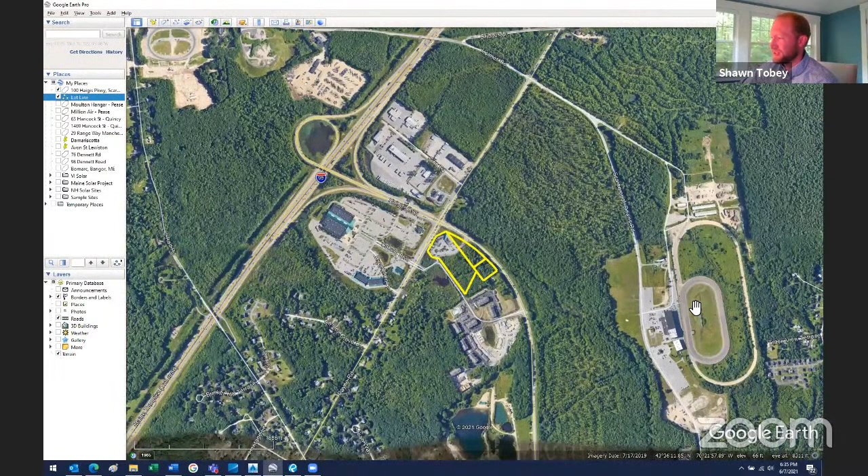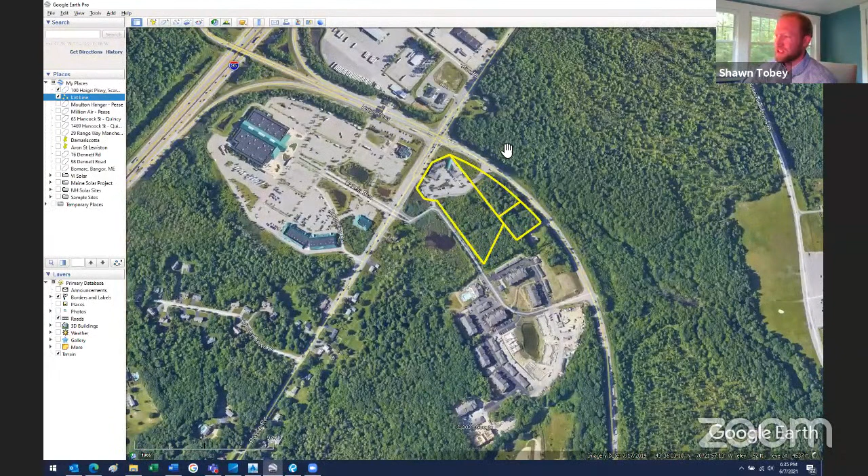I can share my screen here just to get started to show where we are. So this is a Google Earth overview to show where the project is located, on the corner of Haigis and Payne Road. You've got exit 42 here, Cabela's, the Downs here, the Beacon, and then there's the proposed Acura dealership on this corner as well. And if I spin to match the plans, these are the 3 existing parcels that total just over 9 acres.

This is the existing golf and ski shop, as well as the urgent care. So the lots that we are initially looking at are these 2 here. And then because these are all 3 in common ownership, we decided, because of the unique shape of this lot, that we would adjust the property lines to have more area to work with. And as mentioned, the proposed building area is situated probably right about here. There's an existing stream that comes through the back of the site, and then pockets of wetlands in here.

So this is the proposed design that we're looking to do on the site. It would be a restaurant with drive-through facility on the end. There would be a retail component in the middle of the building, a bank on this end, and then a second story of office space. Trying to get a good mixed use clientele on the corner here, especially with the apartments here and all the development going on the other sides. We thought that these uses really coincided with what was there, and would also capture a lot of trips in the area.

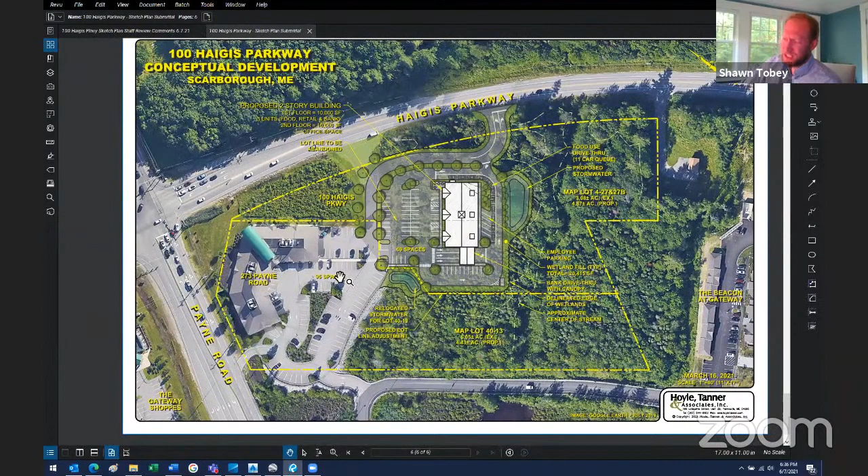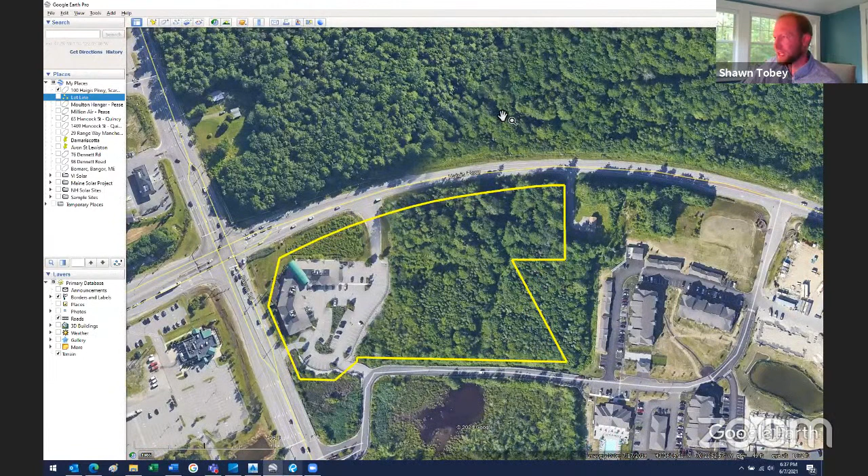So we just wanted to go through with the board, because it's a very unique site in the sense that it has a lot of frontage where you have Payne Road and Haigis Parkway. With the existing access that comes through out to Haigis Parkway, DOT has a restriction on this driveway that any new development here requires pulling this driveway back to the location where it's situated now. So that's kind of why we have this unique driveway that comes through, because we're trying to maintain this pass through from the Beacon. There's cross easements that allow a lot of interconnection to the different businesses to keep trips off of the main roads.

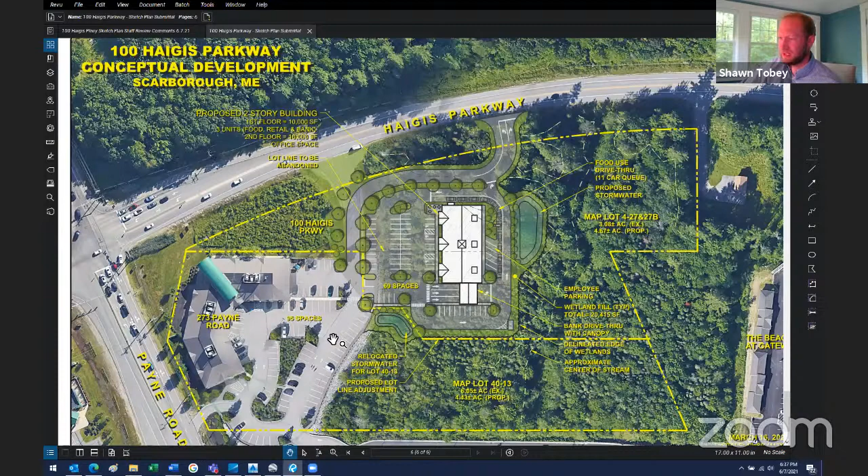So we tried to push the road as back as possible - this is the limit of where the curb cut would be. It's teed up with the Acura dealership that is proposed on the other side. And we bring it in front of the buildings and then back through here. We felt it was probably the best location. We could probably talk as we get into the questions a little bit further with that.

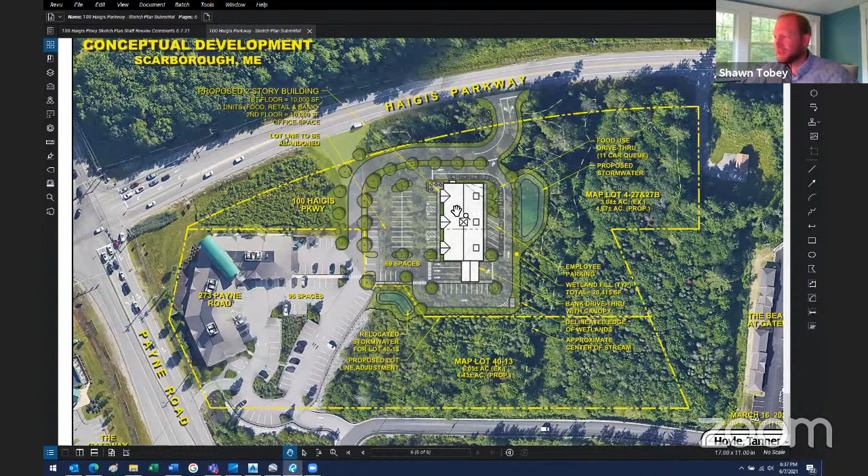And then also with the building itself, we tried to face the building towards the main view shed of the property, which is this intersection. With a retail use, we want it visible from here. And that kind of forces the drive-through to be on these ends here. So even though this is kind of the face of the property, we're leaving the vegetation here while maintaining this is the front. So it's a unique situation where we assume that when cars are traveling 40 miles an hour through here, they're not looking hard right at this end of the building. It'll be fairly screened with the decorative front of the building and the storefronts facing the main intersection on that side.

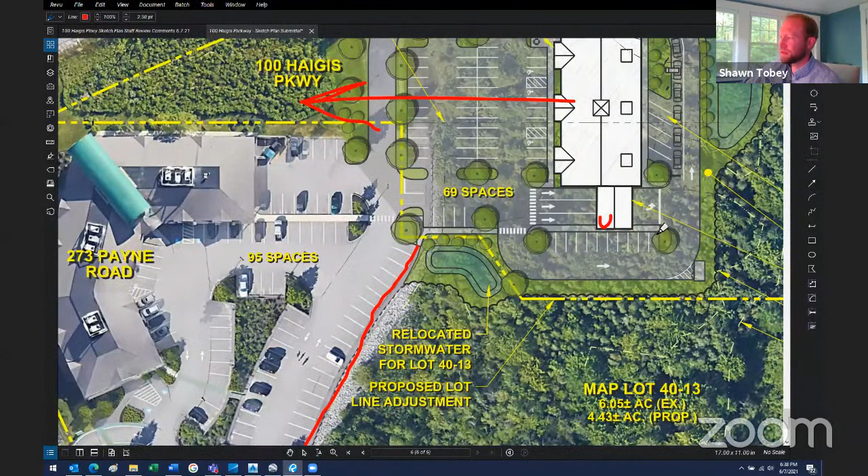We really tried to design it so that all these facilities, the sidewalks, this building has a lot of interconnection. There's a sidewalk that runs through here, connects back around to Payne Road, and then this sidewalk connects all the way back to the Beacon. So with our design, we picked up the sidewalk, continued it all the way through here, and up all along the front of this building itself. We don't have any proposed connection back out to Haigis because there's no sidewalks there now. That's something we could explore if the board felt that was important. But right now we wanted to maintain the good connectivity here as well as all the residents that are out here.

Going forward with the design, there would be some pockets of wetland fill to accommodate this, with the remaining areas staying undisturbed. We're teetering on the line with site law, depending on where we end up with the final layout going forward. Early coordination with DEP has shown that these two properties will be considered common scheme, and going forward with the permits, all of this would need to be worked together along with existing wetland fill.

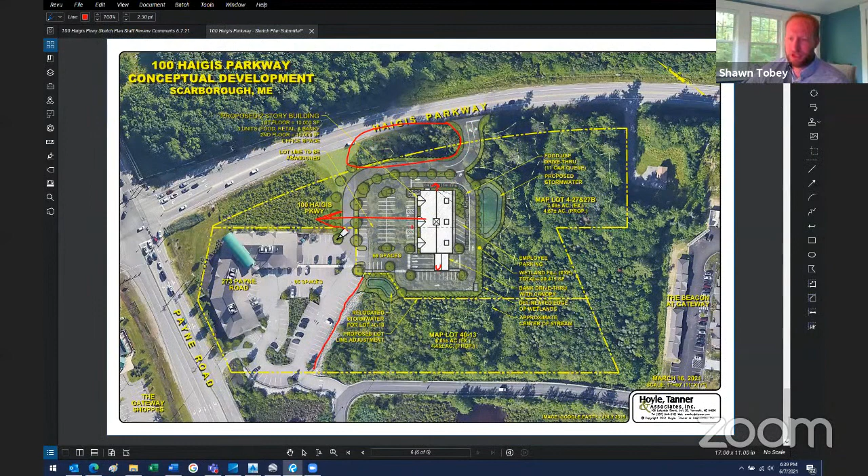So I think at this point, I turn it back over to the board. If there's any questions, I think we'd like to just get some initial feedback, see which direction we should be headed as we take this and put it into more hard line work and design, and move from there.

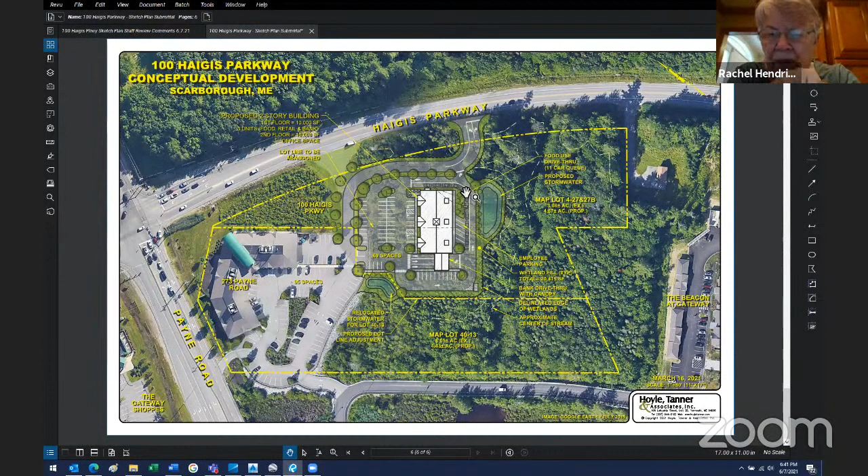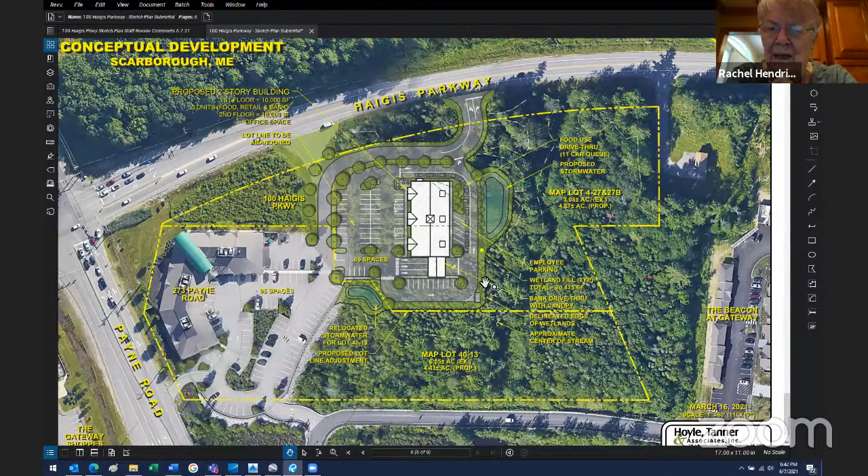One of the concerns I have is the traffic flow around the building. It looks as though you have folks exiting near the south where the bank is. If they want to leave the property, they have to turn left, at the same time as people queuing for the restaurant takeout are turning around that corner and also going left. It seems to me that's a recipe for fender benders, unless there's really good signage or a way of handling that queuing while people are exiting from the drive-through at the bank. You don't have to tell me what you're going to do right now, but that's something I'd have a concern about.

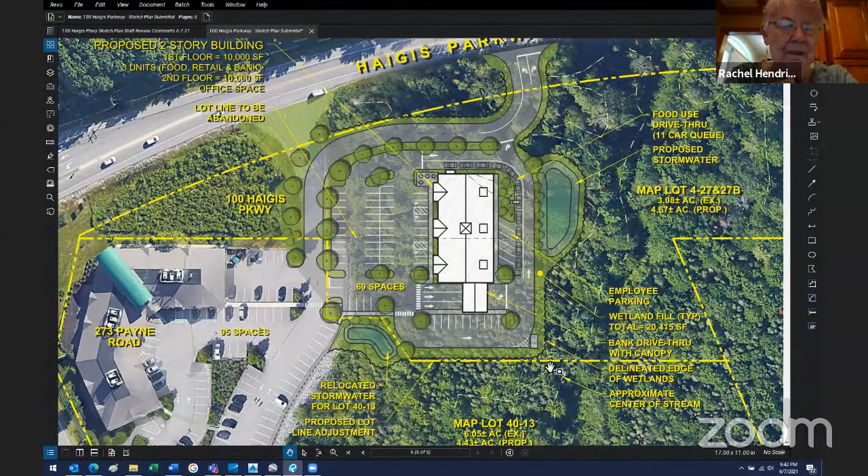One thing that makes a lot of sense is that the front of the building faces the view shed onto Payne Road, rather than having to flip the building to get the front onto Haigis Parkway. I think that's a reasonable way to look at it. It might be helpful if you show us what would happen if you did flip it so the front of the building very clearly is on Haigis. I don't think that would work too well, but I'd appreciate seeing that to come to a firm decision on what we consider the front of the building to be.

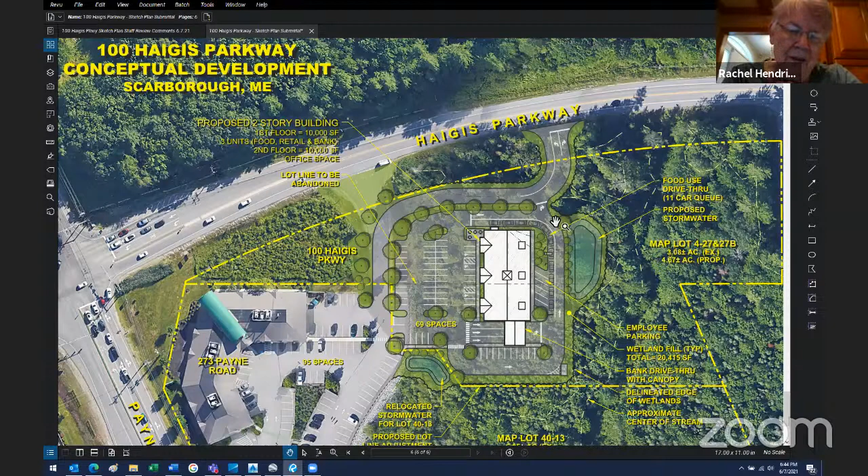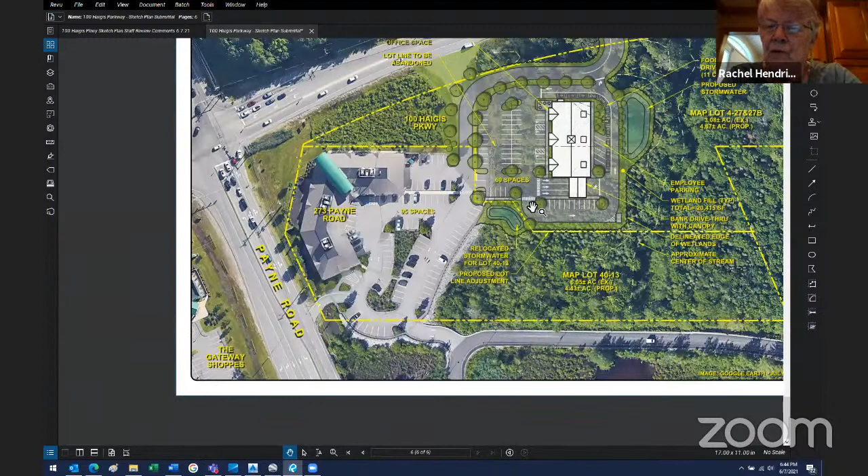I think we need to continue the sidewalks. As we go along Haigis Parkway, as the downs come in, as sidewalks go in, there's going to be more people walking up Haigis Parkway. So sidewalks in a couple of different places would be possible. One is up the curved driveway so people can continue past the buildings already there and cut across to Cabela's at the light, using the cut that's already there since the ground's cleared, making that a sidewalk from Haigis directly so people aren't walking around. That's a possibility, but I do think a connection of this property from Haigis to the Beacon Gateway sidewalk would be a very positive aspect of the development and the neighborhood.

And I think that's all I have. Thank you.

Yeah, we can definitely, the angles of the building we went back and forth on a lot, trying to find the best way to get the storefronts visible and the best angle. We have some old renderings we could submit for reference, kind of as we went through that exercise, so you can see what they looked like.

And with Haigis Parkway, we're coordinating with Sebago Technics, who's doing the Acura dealership, and Gorrill Palmer, as you know, is doing the downs. So there's kind of three people reworking that Haigis Parkway section all at once. We'll work with them to make sure any sidewalk improvements and turn lane improvements get coordinated together as we go forward with DOT.

Okay, I do think pushing pedestrians towards the actual intersection of Payne Road and Haigis is not something to be desired. Most people are not going to want to try to cross Payne Road there. They're more likely to want to cross Payne Road where the Beacon driveway comes out. So any connection to that driveway, I think, is important.

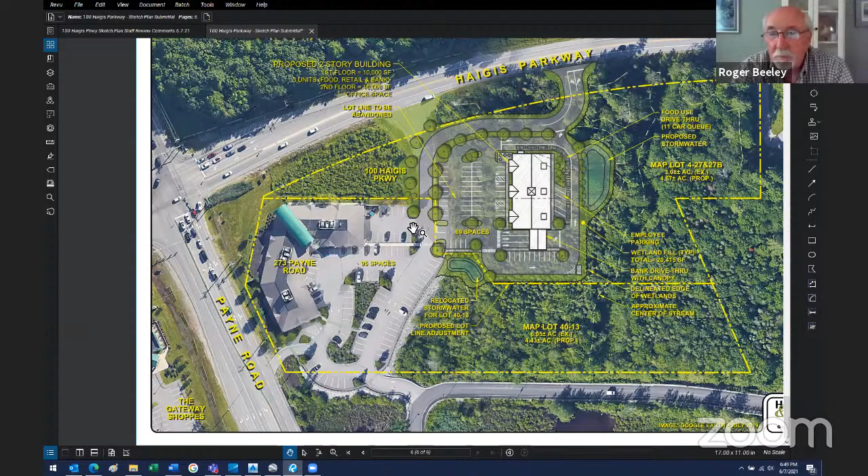Thank you, Roger. Any other board members with thoughts, questions, input? This is Rick, I just have a quick one. Kind of what Rachel was saying, so where the bank drive-through comes around, and there's the other drive-through coming around on that lower right-hand corner.

Down a little bit, right there, that tree right there. I know you're trying to do as much landscaping and make it as aesthetically pleasing as possible, but anything that - I can see that as a pinch point. And then get rid of that.

Our plan with this is that if you're coming into the drive-through, you would come in through here, go around, and then you would queue. There'd be an 11 car queue here, which is sufficient for the use. And then the bank would come through with a stop here and a stop bar. Like you said, we'll remove that tree and make sure that's not a pinch point. And then this drive-through would exit back through here. And any of the bank with a bypass would have a right out that way if they had to. But we'll definitely go through that in more detail and make sure that's a solid flow.

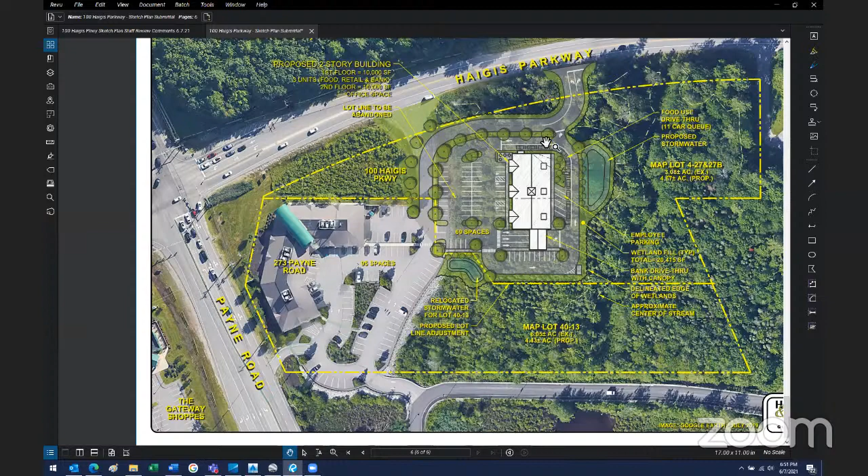Okay, appreciate that, Sean. The other thought would be up where you just exited to the right - yep, right there. I'm not sure if it makes sense or not, but that tree line - if I was exiting to the right there, I may want to take a left just because I could. If that tree line and that island was shifted up a little bit so that you could impede that left-hand turn, then they'd have to go around the parking lot. From a traffic accident standpoint, that might be something to consider. I don't know if anybody else...

You know what, Jennifer might have some input on that. She's the traffic expert. All right, thank you, Rick. Jennifer?

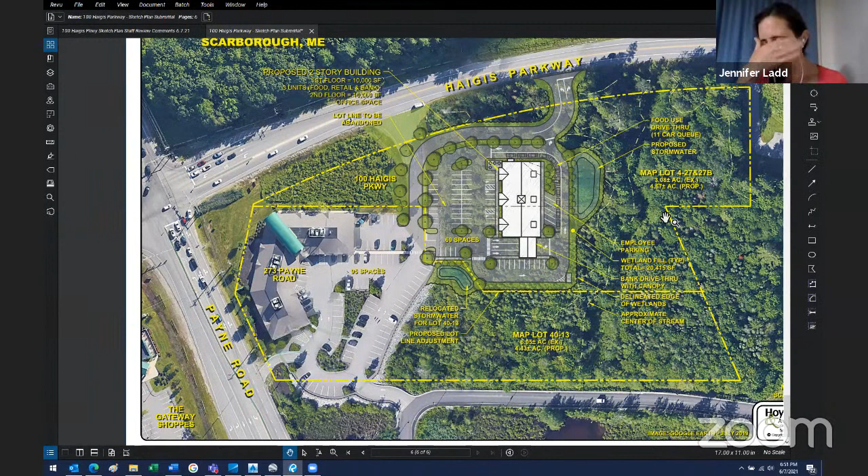I had the same question, Rick, actually, until I noticed that they did include a bypass lane before that point for traffic wanting to take a left. Is that right? The two arrows there - so if you were not to go through the drive-through, but you wanted to head back towards Payne Road, you could continue out and around and then go north or south from this point here. Gotcha, yeah, it just took me a minute to kind of mentally drive around there myself.

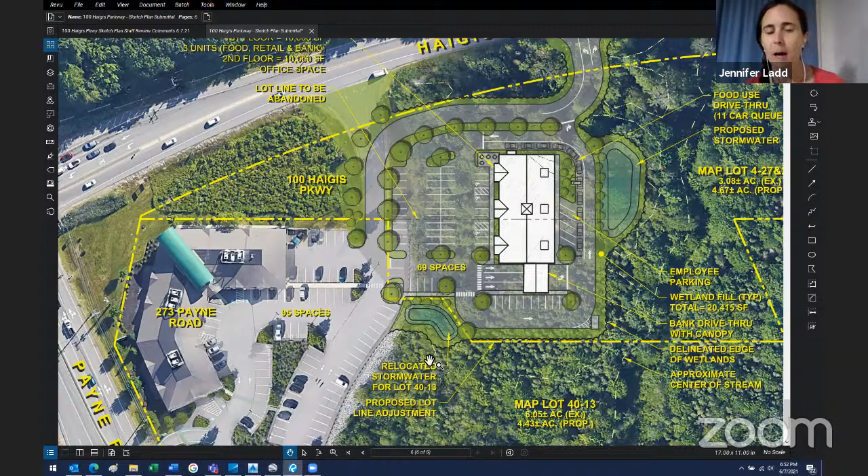Which actually brought me to another comment - understanding you're just at sketch plan level and not fully dimensioned here, but the drive aisle at the very bottom of this plan, yep, right there with a one-way arrow. Again, for someone, as you have this laid out, if someone were to leave one of those parking spaces and want to head back to Payne Road - the way that you've laid that out, while it makes sense to me, if it didn't make sense to me, it would feel sort of circuitous. And I think it could lend itself to people going the wrong direction there.

So I guess I would just be curious to know if there's any possibility for that to actually be two-way and signed two-way, such that it just allows a little better two-way flow around that part of the building. Yep, I definitely think we could look into that. And another thought too - I believe we're overparked by 12 spaces between the two buildings, so we had a little bit of flexibility. I think maybe we could look at the option of just eliminating all those spaces and making that a landscaped area as well, just so there's not those pinch points.

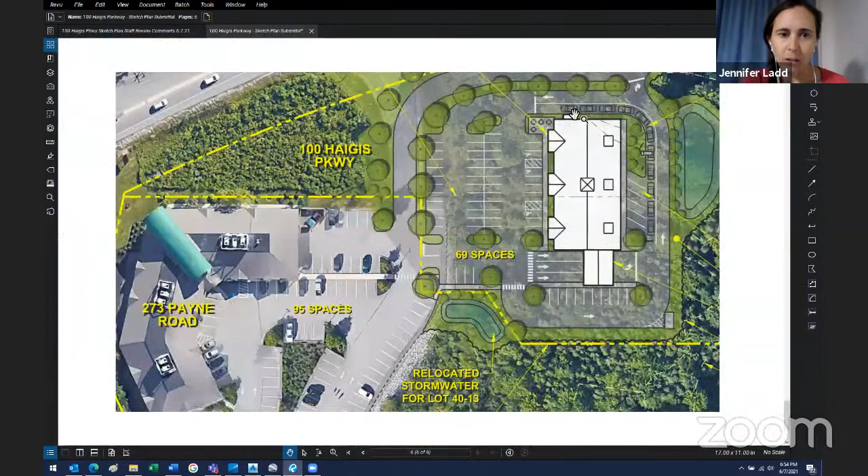The other thing, it looked like to me like a slight skew in entrances to the two different parking areas. So for example, if you've come in off of Haigis Parkway and along the long driveway, right where you have the first opportunity to take a right - yep, towards Golfin Ski - or left. I'm sure you are looking to try and get the longest parking stalls that you can in that main parking field, but sometimes misalignments like that can be a little bit tricky. Yeah, and we can look at the option - maybe the best bet, maybe lose a little bit with the building, but we could shift this up so those two were probably 12 feet apart. We're probably not too far off to get those aligned.

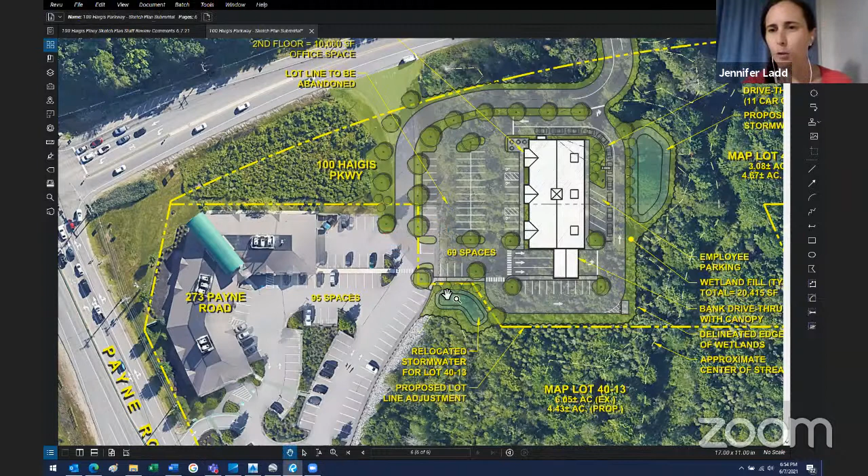Yeah, I mean, I just picture a plow driver or something - they're probably going to plow over that or whatever. And then I did notice early on the proposed pretty good pedestrian connectivity on the site that you are proposing, and how that connects in with what's already there at 273 Payne Road. And therefore then also noticed the lack of similar accommodations out towards the Parkway.

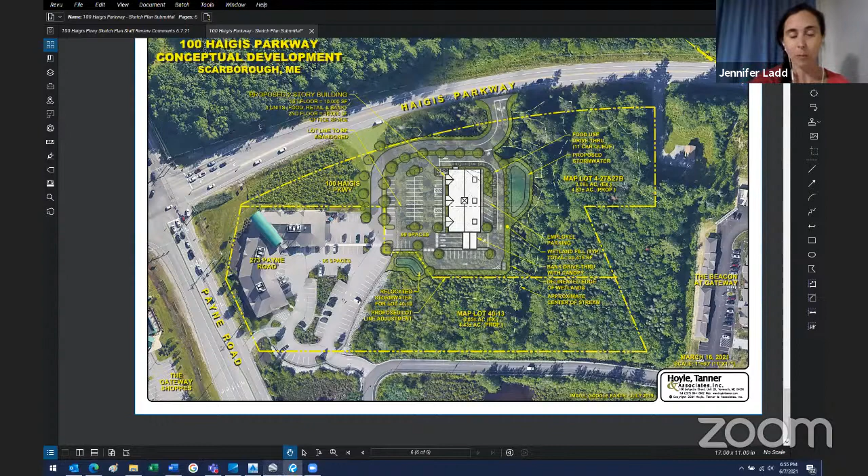While I agree with a lot of the comments about the development coming in this area, bringing more people living and working here, being here within walkable distance for the better part of their days, I just can't get over the width of the right of way on Haigis Parkway. It's so huge, and the infrastructure both there and at the intersection with Payne Road doesn't appear, at least in this aerial view, to even have pedestrian accommodations now. That's not to say they couldn't, but all this infrastructure and the distance between these things is very large. So I am always in favor of the best way we can support these types of developments with walkable infrastructure where that's most appropriate.

But I'm curious, does DOT have any plans? I'd hate for one development like yours, or any others we've looked at along this corridor, to come in with sidewalk connections only to later have the road widened or changed significantly. So it could just be a simple question to DOT: do you have any plans on a somewhat feasible horizon to do anything different out here, whether more pedestrian friendly or less? If you can get an answer, great. If not, we'd probably look for similar accommodations as we would on any other site. I'd just hate to see you or anyone else make that connection without the supporting infrastructure ever being there. I don't know if that makes sense, but that's what I've been thinking about looking at this site and the corridor overall.

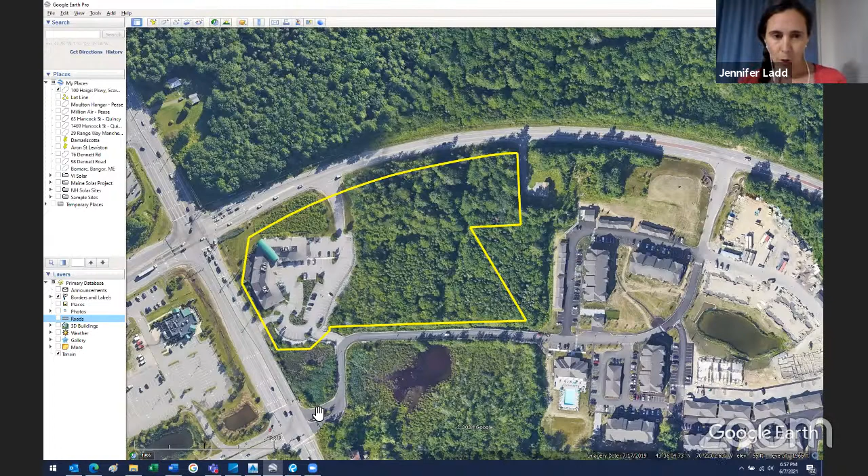And then my only other last question was whether you had any high-level plans for development of that bottom lot, lot 40-13, it looks like, and if so, how that might integrate into the site plan you've laid out for the current building as proposed. Also, understanding that you are relocating this one stormwater feature as a result of this project.

I don't think at this point there would be any plans for 40-13. We don't fully know, the wetland flagging stops here, but this is all pretty much wetlands through here, so that would just be left as is.

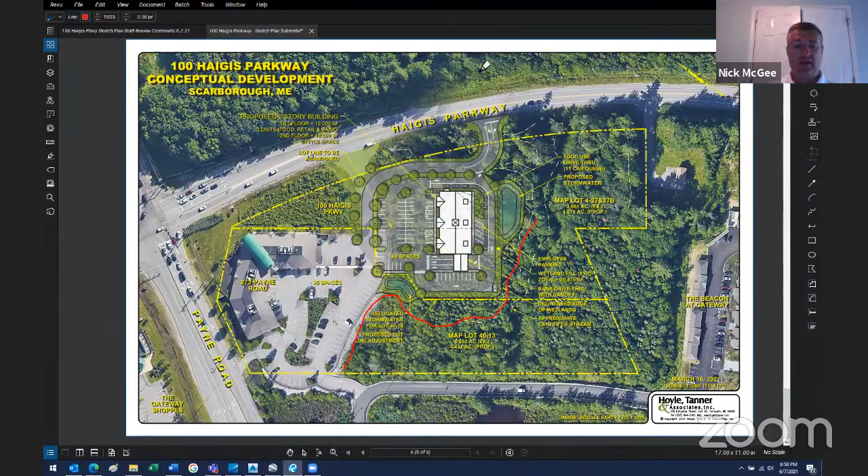Okay, thanks. Thanks, Jennifer. Any other board questions or comments? Okay, with that, I think we'll see you again in a few weeks, perhaps, and hopefully you take all of that feedback and you'll be on your way for your site plan. All right, well, thank you for the comments, and we'll be back. Thank you very much.

Next item on tonight's agenda is 3 Diamond Realty LLC, requesting a master plan amendment review as part of the plan development project for 25 to 29 Haigis Parkway, Assessors Map R52, lots 34A through C.

Thank you, Mr. Chair. This project is also in the Haigis Parkway zoning district, a little bit south of the last project. As the board may recall, the applicant received approval for this master plan back in 2020, and is before you this evening to amend the master plan to revert the plans back to the original subdivision property lines approved by the state in 2008. The applicant is also proposing to update the approved square footage ratio of non-residential versus residential uses. The applicant was last before you at your May meeting, and staff suggested providing additional details on the conceptual build-out analysis to ensure the proposed parking and stormwater management elements would be adequate in the future. The applicant provided these details, and staff is generally comfortable with what was provided. At this point, staff will share a draft motion for the project if the board is ready. Turn it back to you.

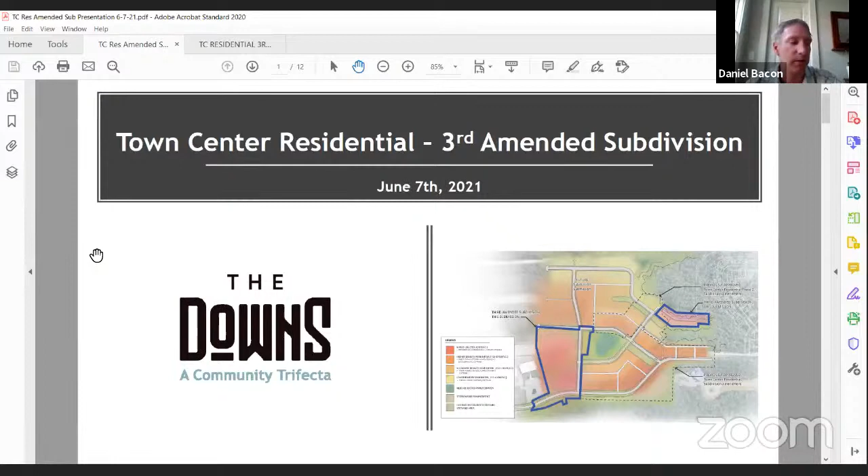As Jamel indicated, this subdivision amendment - Drew, if you don't mind sharing your screen, can add some context here. This subdivision amendment really is geared for two areas of the Town Center residential part of the project. As the board knows, we're incrementally building out the Town Center residential district between the heart of the project, the grandstand area to the north, and phase one, the Mill Village area to the south. As you can see on this plan, this amendment creates the lot for the American Homes Senior Living Facility, which the board looked at for sketch plan. That's one key reason to be before you.

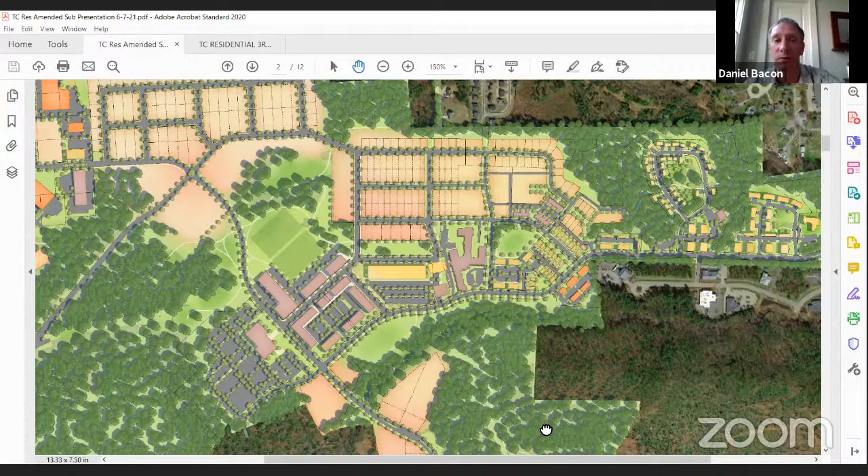The second reason is to continue residential development to the east and round out our second pocket neighborhood. The pocket neighborhood design with 8 houses surrounding a green was super successful in the first phase. You can go out there today; some of them are beginning to be occupied. So we're going to do another small pocket neighborhood in this next part of Town Center residential. Next to it, we're adding an additional lot for multi-unit type housing - we're thinking about micro homes or tiny homes, but that design process is still underway.

So at a high level, those are the two reasons for our amendment before you this evening - to keep American Homes on track with their site plan review and continue that pocket neighborhood. From there, I'm going to let Drew walk through the details and then answer some of the staff comments. Thanks.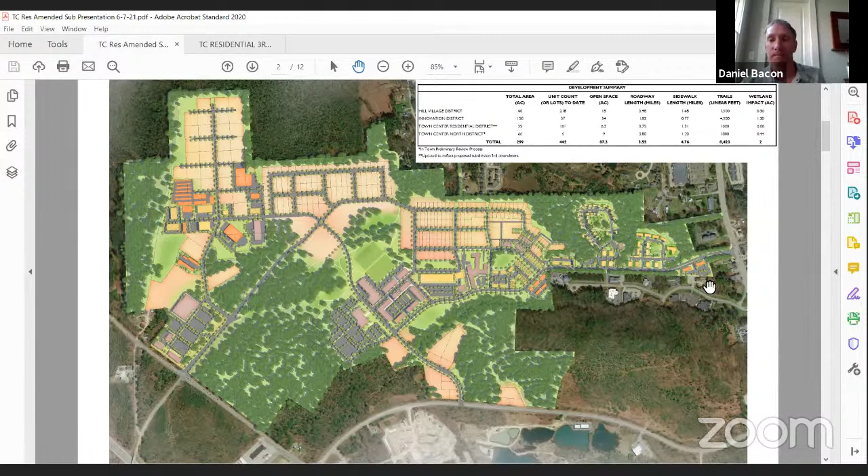Thanks, Dan. Drew Gagnon here with Gorrill Palmer. I'll walk you through a bit more detail on what we're providing in this third amended subdivision. This is a zoom in of that master plan I just showed you. The red highlighted area is what we are applying for in the third amendment subdivision. As Dan mentioned, this is lot 34, which we're calling American House at the Downs - that was before you for sketch plan 3 weeks ago - as well as completion of the second pocket neighborhood in this area, and the creation of a multi-unit condo project Dan mentioned. This shows the second pocket neighborhood planned right here; this is the first one currently under construction and getting occupied.

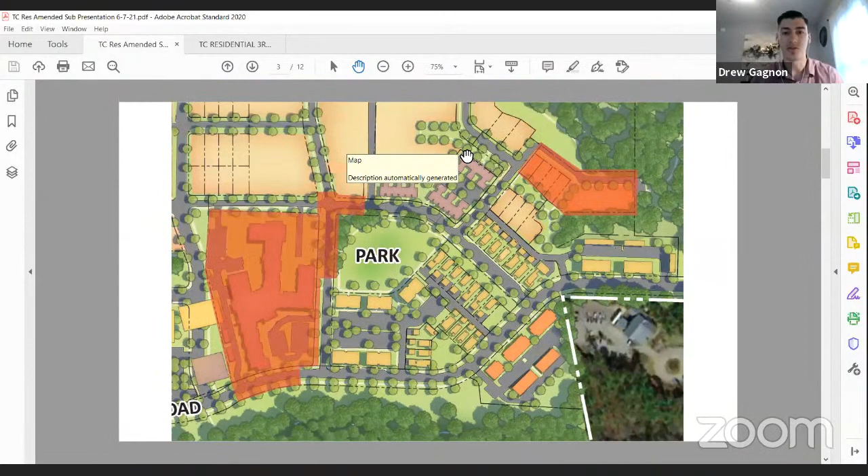I'm going to turn everyone 90 degrees again here and show the engineering plans. This is highlighting everything, the limit of work with the dashed line here. I'll start at the northern end of the project, which is on this side - this is a blow-up of the Redico lot that we've been calling it, which I mentioned was before you from sketch plan. So the scope of this work is extending Downs Road about 220 feet with all the utilities, as well as looping Frontrunner and Hackamore around the gravel wetlands.

If I go back a slide, this was proposed as a performance guarantee from the second amended subdivision, as just a formal connection that we worked out with the fire department and town staff for the townhouse lot. So we're back in front of you for the formal acceptance of the roadway as part of this next third amended phase.

So with this lot, we're also proposing gravity sewer main down to the second pump station, which will be the second one on site. So we'd be extending or creating the sewer main, a 12-inch sewer main up Downs Road in the alignment of the future and existing Downs Road, as well as cutting across lot 34 for future development.

So we're cutting across this lot here with an easement to benefit Scarborough Sanitary District in order for future development east and north of the Downs to be able to hook up to a public gravity sewer main and convey the flow down here. This hatched area is the easement area, and this is also a stormwater easement area for Redico as well.

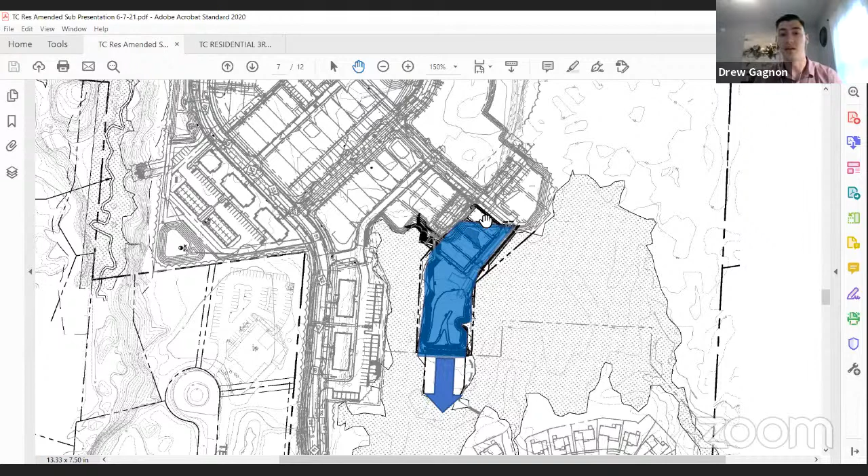That's been planned for all along, so we're just providing that treatment. And then down here, as part of our level 2, which is pending, and I'll get into the schedule of that in a little bit, a portion of this lot and a portion of the multi-unit condo lots will be going to the level lip spreader just south of the site. And then we're also using drip edge treatments for the houses along here and in here. Fairly simple stormwater plan.

This is just a landscaping plan, and I'll touch on some of the town comments here in just a minute. Really, the bulk of the landscaping is being focused up on the public right-of-ways that we're proposing. So we have street trees on both sides of the road on Hackamore and Frontrunner, and then on one side of the road on Scarborough on the western side.

So I'm going to discuss quickly the Hackamore Avenue and Frontrunner Way connection. That'll go on the next slide, so I'll skip that for just a second. Street trees and lighting along the private drive.

Town comment was they're requesting street trees on both sides of the private drive as well as lighting. Consistent with previous phases, the lighting is really intended to be from the garages of the individual homeowners, so that's going to help light the roads there a little bit.

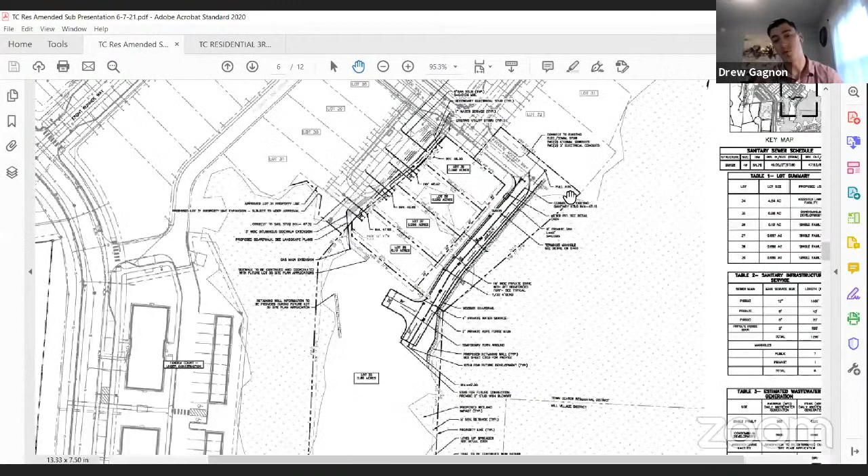And then street trees - if I go back just a couple slides here - this entire eastern portion of the private drive is going to remain intact as it's a big wetland. And we actually have a retaining wall fairly close to the drive aisle there, so the trees will be very close to the drive aisle already. The existing vegetation is going to be cut back just enough to get the wall in, so it's only a few feet off the retaining wall where the natural vegetation will be.

On the other side, consistent with what we've seen in the first phase where we have these really thin lots and then the driveways essentially take up almost most of the lot to get to your garage, there's really not a whole lot of room for any street trees on that side, with the presence of some utilities and services that are going to be in there as well.

Street trees along Scarborough Downs Road. So as I mentioned back on this landscaping plan, we're proposing it on the western side of Downs Road with the presence of on-street parking, which is going to help this Lot 34 here and plus the driveway.

We really don't have any room within the right of way with a sidewalk abutting the on-street parking. So the idea here is that the Lot 34 landscaping plan will incorporate elements that will feel like there's going to be trees in that location, as well as other vegetation and bushes along this frontage, as we discussed during sketch plan. We feel like that'll provide the same tree corridor coming up from Phase 1 and Town Center Residential.

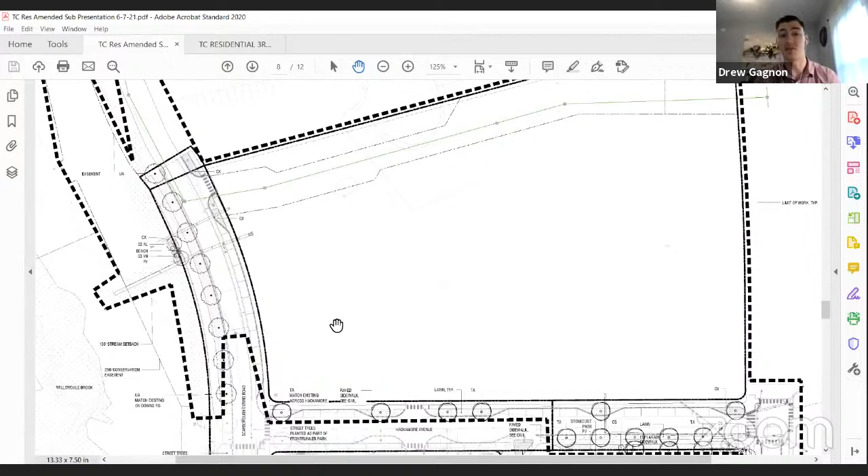Placemaking - there's a request for gathering space, plaza, common areas by the gravel wetland down here. We are proposing something happening there, but we also want to work directly with town staff on that. We feel there are some retaining walls along here that provide nice seating for the gravel wetland. We really want this place to be recreational and passive recreation space, as well as open lawn space, so we don't want to clutter it up with too many gathering plazas and hardscapes.

So we're really looking at supplementing what's already there with some approved benches from the previous phase, as well as some additional areas on the corner of the intersection here that kind of ties in with the rest of the intersection in future phases as well.

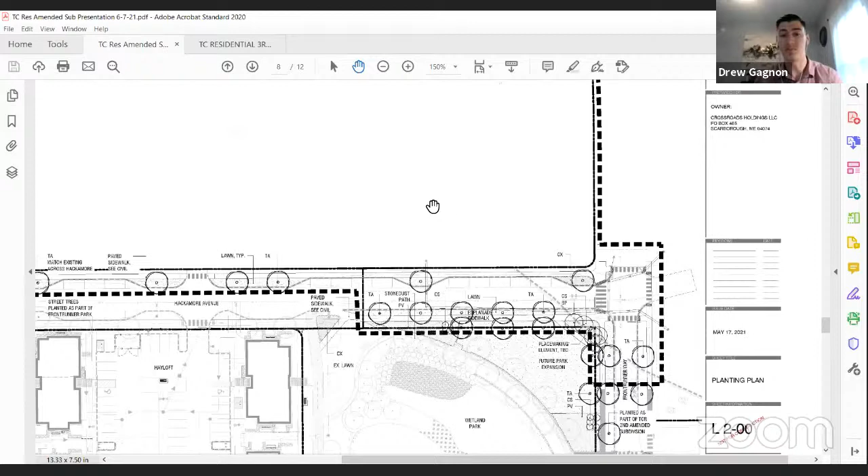And back to the main DEP level 2 application, that is on schedule. We're anticipating getting approval for that in early July, so a little less than a month right now, I believe, is where the goal date is. We've had a first round of comments with everything, and everything's looking pretty good. We're just tidying up some responses to that.

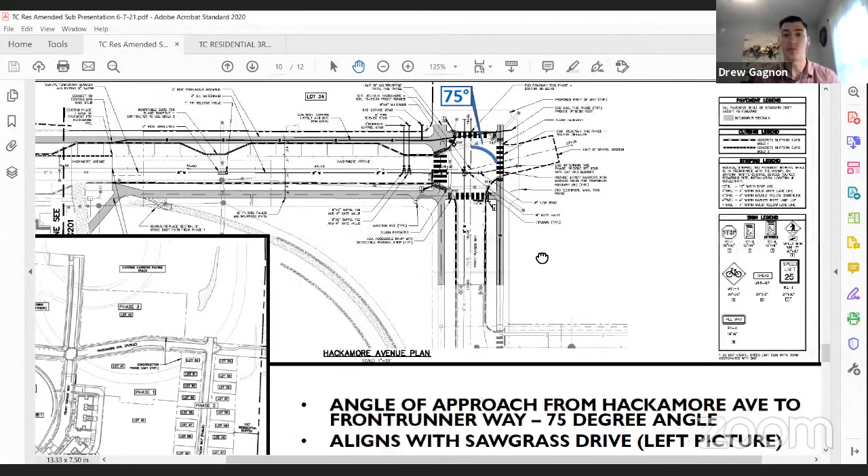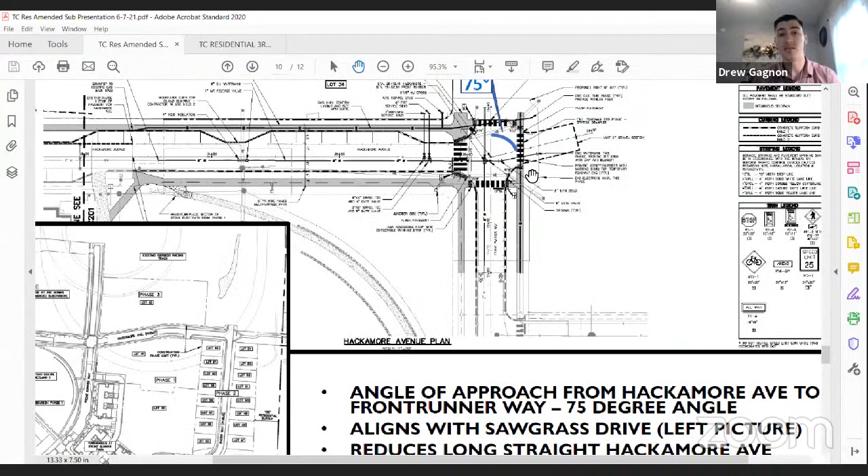I wanted to get into the Hackamore Frontrunner intersection real quick. We did have a town meeting last week about the future phases of this project, but we did discuss the intersection angle that we are proposing - kind of half proposing in this phase, but it really gets carried through in the next phases. As Jamel mentioned, the Frontrunner extension is coming in at a 75-degree angle.

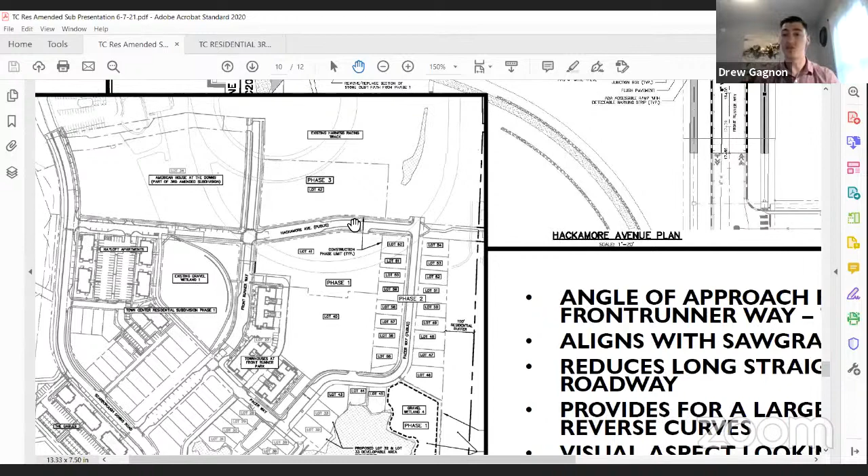There's a couple of reasons for that. One, we want to align with Sawgrass Drive. Now, we're not providing vehicular connection, but we're providing pedestrian connection to Sawgrass Drive. We want to line up with what their right-of-way is. So right here, you can see on my screen, this is where the Sawgrass Drive right-of-way is. We want to line up with it sooner rather than later to create that nice straight connection, at least from a pedestrian point of view.

In addition, by having this slight kink in the intersection here, we want to break up Hackamore Ave so that it's not completely straight for a longer period of time, and then reverse curve it back into Sawgrass. So we thought that provided a nice breakup of having a long straight roadway. In addition, and this plan over here - I'll keep going back to it -

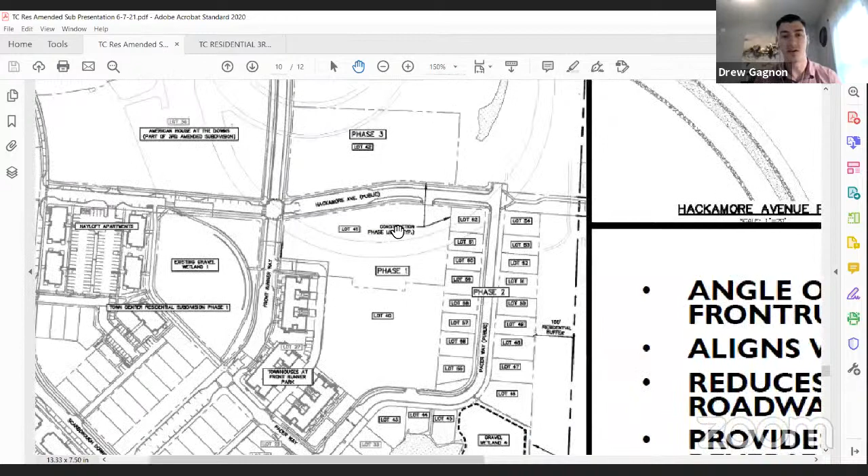this provides a nice green open area right here for future development. So if we were to come in at the traditional 90-degree angle and do reverse curves, we're going to chew up some of that green area, and this is going to provide more area really for the green space, complementing the adjacent park here to the east and to the west of it.

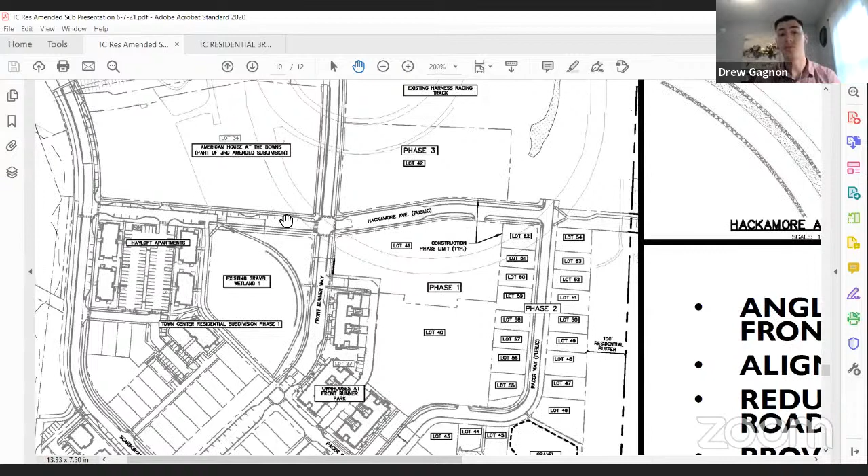And to that point, from a visual aspect, we really thought that if you're coming down Hackamore Ave, it'd be nice to look at some green space and common area right here as much as possible, rather than staring at more roadway and on-street parking. So we really thought if we could get it over there quicker, while still meeting all the town ordinances on street connections and angles, that this would be the preferred option.

And that way we can provide some sort of placemaking element here to complement the gravel wetland park on this side. So with those reasons, we propose just a 75-degree angle versus a 90-degree angle. Like I mentioned, that does meet the street acceptance ordinance, so there's no formal waiver required for that.

There are some examples around town, and I don't need to go through these individually, but I wanted to provide some quick aerials of other intersections that have less than a 90-degree angle from a residential standpoint. One I want to draw your attention to is Eastern Village with Inspirational Drive and Traditional Street. We're very close to that intersection.

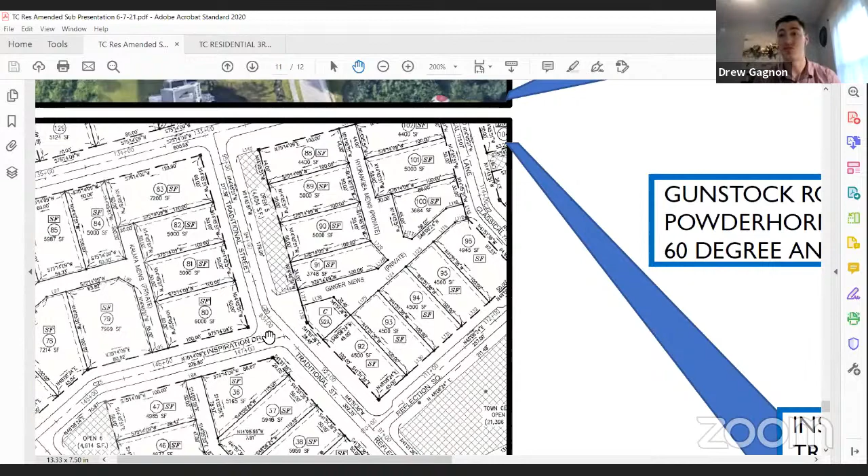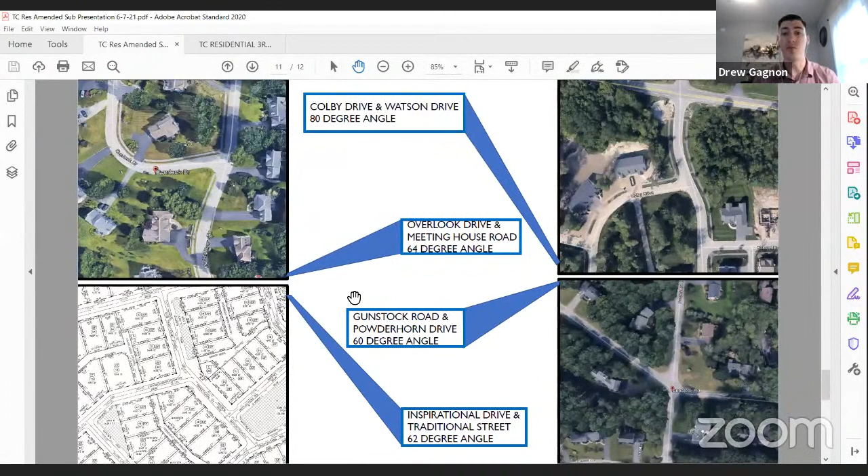This one provides a wider radius since the streets are a little tighter on the angle, but we're very similar to other neighborhoods and residential streets around Scarborough. We've also provided full auto turns, and this intersection works with a 40-foot fire truck coming down Hackamore and taking the tightest angle, the 75-degree angle north to Front Runner. So we are providing adequate turning movements for the entire intersection with the design vehicle.

That's really all I had for presentation tonight. I'll turn it back to the board and I'm happy to answer any questions.

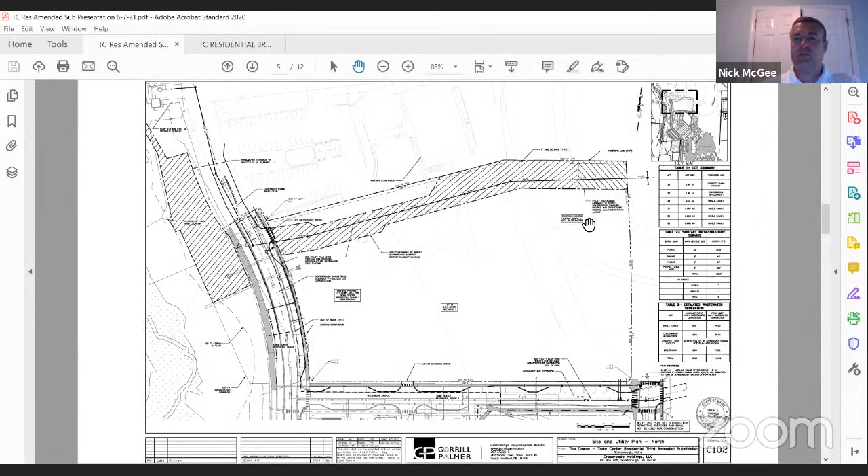I have Kinley. Hello, can you hear me?

Yes, welcome. Hello, board. I just have a question with what Drew was talking about with Hackamore aligning with Sawgrass Drive. When you talk about that alignment, is it for vehicles to go through Sawgrass Drive into Hackamore Ave, or is that just more for pedestrian walking?

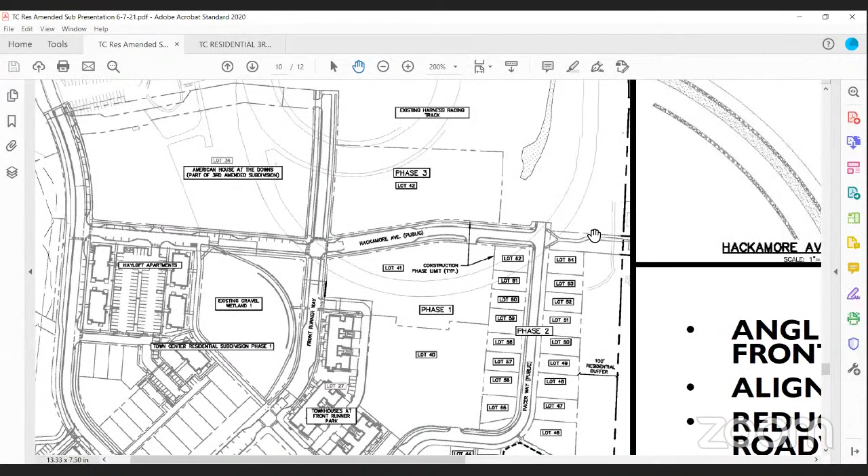So just so you know, if you have any other questions, address them through the chair, and then the board will formally request answers from the applicant. My apologies. Oh, no, you're fine. Do you have other questions you'd like answered as well? Nope, that's the only one. Thank you. Okay, thanks for attending.

Drew, or Dan, if you would be so kind. I think it was a good question. Sure, I can speak to it and Drew can add on. The intention is to provide a pedestrian connection. We're not proposing a vehicular connection, nor is it allowed under the zoning ordinance.

The zone doesn't allow for a vehicular connection that provides access to the entirety of the downs, so it would be a walkway. In addition, the Portland Water District is requiring a public water main connection, so there would also be a utility connection within that area, but again, it wouldn't be a vehicular connection. Thanks, Dan.

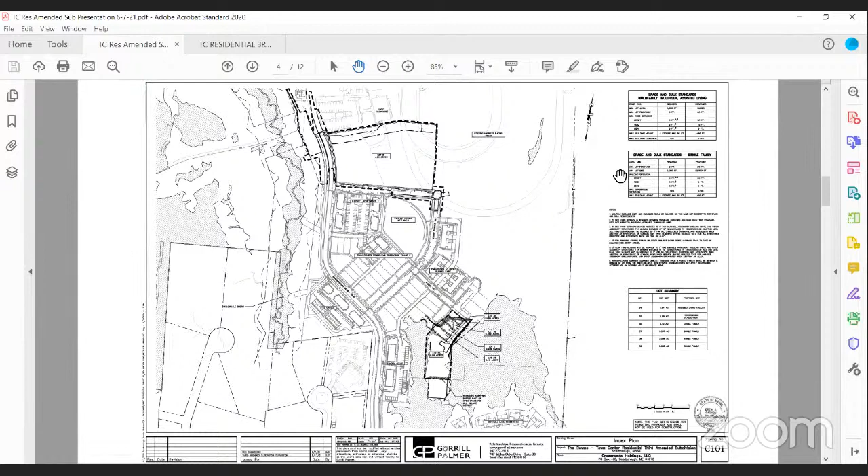Drew, Dan? Yeah, with Crossroads building and developing all these houses, to date there's been garage-mounted lighting on every single garage built in the first phase, and that worked really well with Futurity Lane. Hayloft is also an access drive, so Daisy Cutter and Futurity Lane both have lighting along that. So we didn't provide any formal pole lighting along those private drives, and we're trying to be consistent with that.

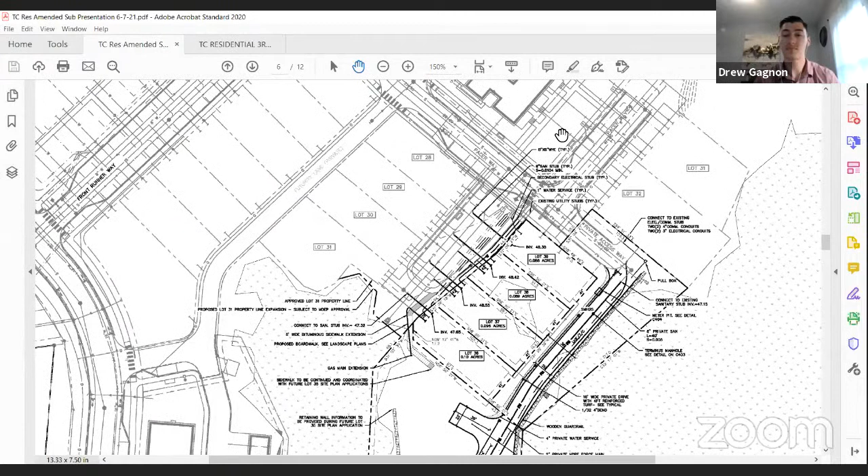I think, if I can just clarify, Rick, I guess the staff comment was really just about that curve as you come around. It is a private drive, or actually a private driveway is what it'll end up being called. So I understand the comment from staff wasn't necessarily addressed by the garage lighting at that corner. It's a 90-degree bend right in the driveway. I think that was staff's comment, just to clarify.

Yeah, so that's where I was going with that. I would think that staff, I think we need a light on that corner, if that's not too much of a problem.

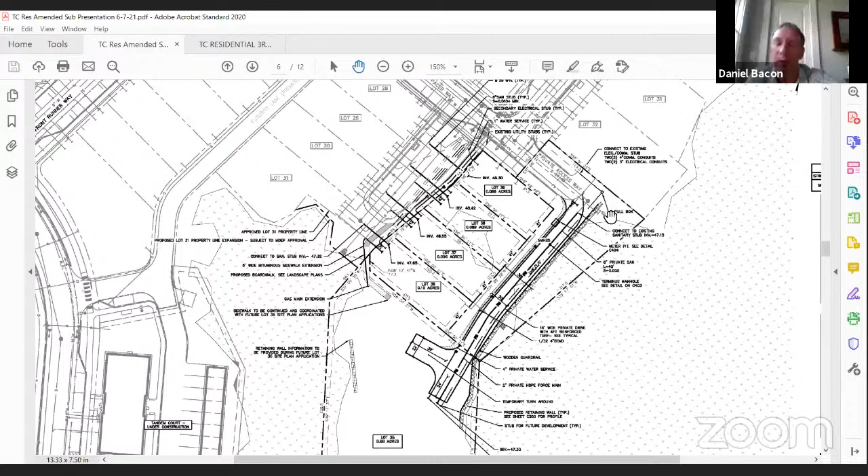Yeah, we can certainly look at that. We weren't clear on whether it was the entire private alley, but I appreciate that, and we'll look at adding some type of lighting in that location. Drew, I don't know if you attached the photometrics plan or not, but that could help us. Well, we can work on that before our next return to the board.

Thanks, Rachel. Okay, that's the only concern I have, Nick. Yeah, thank you, Rick. Leave that one up that you've got.

As I recall, in a prior meeting when we approved the townhouses and the 4 lots shown on the screen, we talked about the open space in between the development. At the time, I asked what was going to happen to that in terms of placemaking, and I think the answer was that it would be handled when the whole area was built out, when this pocket neighborhood was completed. So at some point I'm going to be looking at that open space to see what you're planning to create a good gathering space there.

The other question I had was, you talked about micro homes. Could you talk a little more about that? Is that down in the larger development, the larger space?

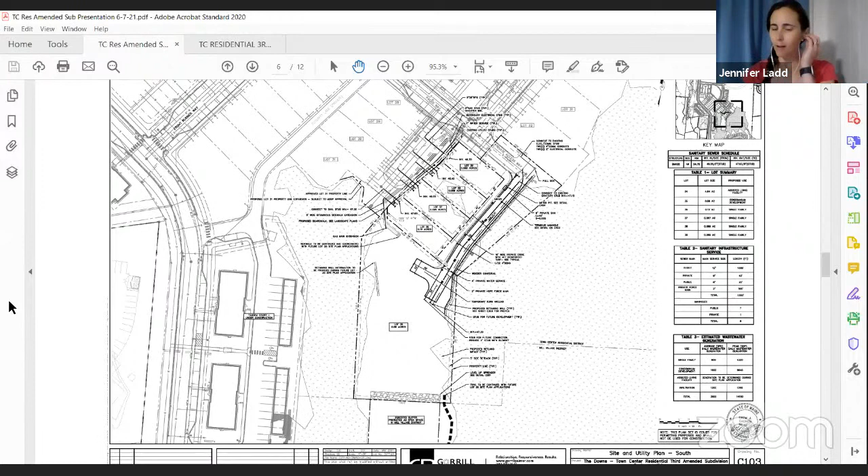I would like to chat about the 75-degree street. Or I just have a question. I'm curious, before I even get to my question, the other examples of where infrastructure like this exists in town was very helpful. So thanks for whoever did that Google searching.

I was just curious if you have looked at any sort of very small roundabout here. I noticed on the slide earlier with the very large scale overall view of the Downs in its entirety, there are a couple of other locations where it looks like maybe that's proposed. In the interest of trying to achieve some of the other traffic calming, it just seems like it would potentially fall in line with some of the advantages you were talking about, Drew. However, I say that recognizing they often require more space than we typically provide for road alignment in a 4-way intersection like this. But given that there may be a little bit of flexibility on that, I was just curious if you have looked into it at all.

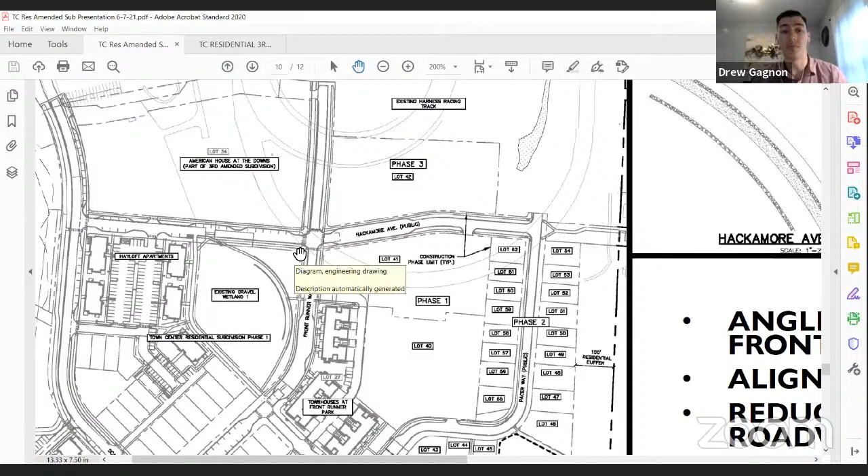Yeah, I'm sure Dan will chime in too, but my initial reaction is we did think about that. And really the space is the thing that kind of puts a halt to it in our opinion. We're really trying to provide the passive recreational and open space along the edges of basically these 4 lots. With that roundabout, in order to get the design vehicle we need to get through there, it really kind of blows up this intersection quite a bit. And it's basically taking away from that other green space, giving it to the center of the roundabout, which then is really not usable at all. No one's going to use that for actual open space, or even get to it. You don't really want to put pedestrians there anyway. So that's kind of my initial thinking, it just didn't make sense in this spot, to be honest, given that we're trying to maximize the passive recreational open space.

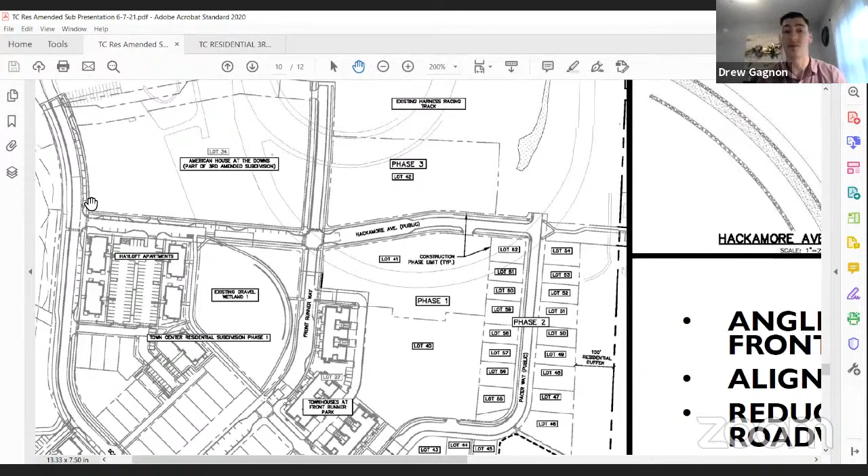I don't have too much to add to that, Drew. And I know the board can't see the green space we've described on lot 41. I was thinking in our next submission we could provide more information on that, because we're describing it as green space and you're not benefiting from a plan that shows you that. But we think there's a nice layout to lot 41, a triangular green space created by having this road adjustment, to really kind of break up Hackamore and have it slightly realign, obviously with Sawgrass, and to create that place, and also have a building on the other end of the green that really frames your view looking down Hackamore. So we can provide that information to help you understand that design desire. And then we can also provide other information to help address any concerns with that angle. But we think it is the proper design here. We can just work through any concerns with it.

It doesn't seem dissimilar to others in the community that have been approved in the past.

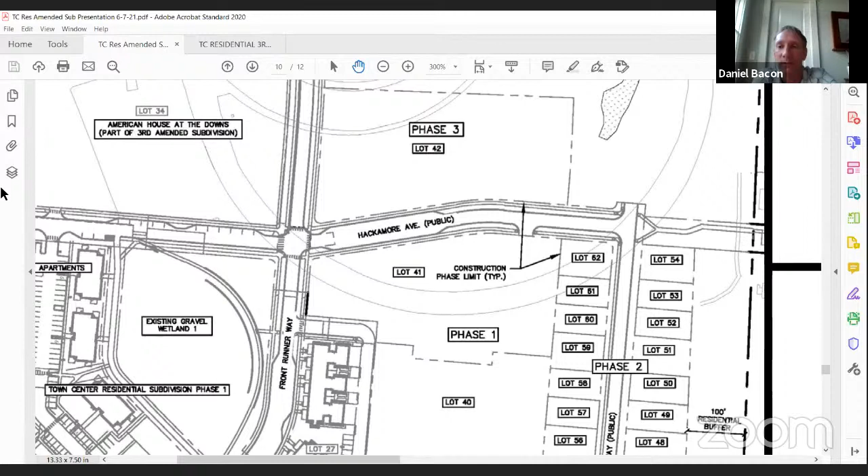I guess one of the things that made me think of it initially was the softer edge shape of the existing gravel wetland, and thinking about some of the green spaces you've talked about, particularly for passive recreation on that corner, as well as that of the American House lot. Just given that, the lines just seemed as though they would complement around a more circular feature there for starters.

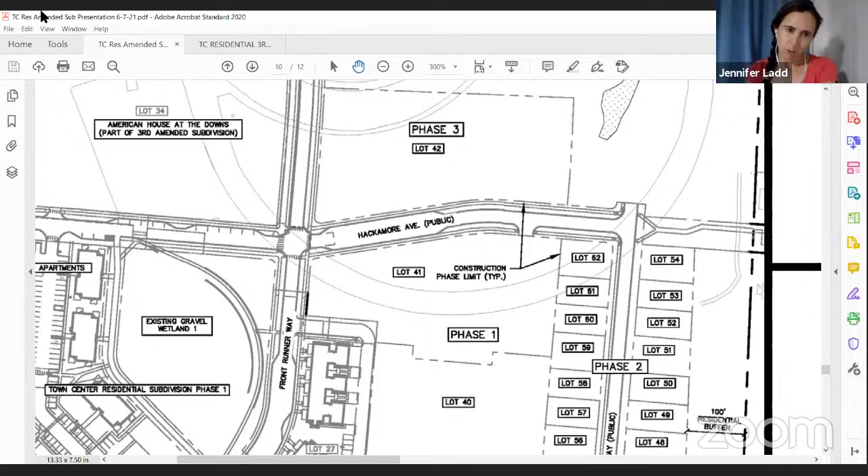But then also, thinking about the traffic elements and what that might look like. It very much looks like the road here, the continuation of Front Runner Way, would be heading into what I think we've all been talking about as the downtown area, the heart of this project. And that is also a pretty straight alignment. So I'm just curious about it from a number of angles: traffic calming in particular, pedestrian friendliness. It's hard to run a stop sign at something that forces you to go in a roundabout way, no pun intended.

But I understand the space issues there. I just think that in some cases you may check off a number of the boxes you're trying to accomplish by also doing that placemaking type of thing, instead of having sidewalks that come together at a 90-degree angle. If those are adjacent to recreational spaces, human nature is not to walk in 90 degrees, it's to cut across the corner, which would echo a more circular feature. That's all. And then the only other comment or question I had is not really appropriate at this level, so I'll ask it another time.

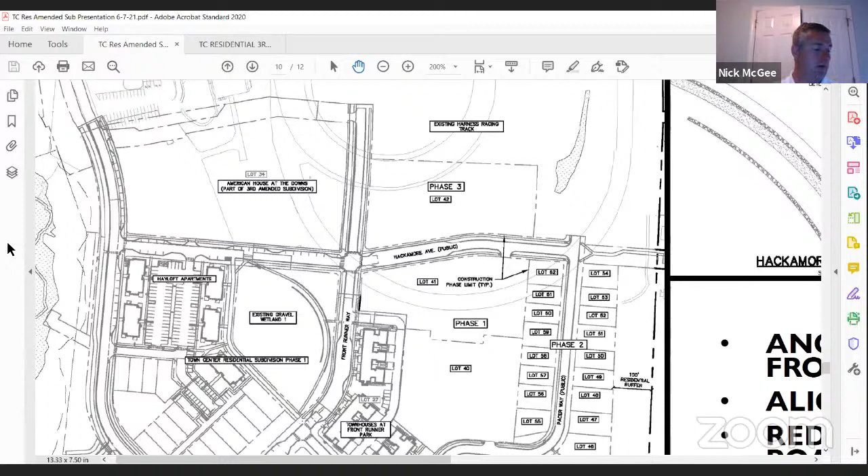Thanks, Jen. I just want to make sure that the applicant and the board are on the same page on this, because what I have for notes is that staff made a couple of these suggestions, and the applicant is saying there are reasons they're not doing them. Whether or not the board is looking at the applicant's presentation, by not mentioning street trees or street lights, it sounds like that will probably get addressed one way or another. But pedestrian gathering places, things like that, we've heard the applicant say these are why we're not doing them, and we heard staff give reasons why they're either required or encouraged. So I just want to be clear there's not some misunderstanding. Is the board comfortable with the applicant's approach and presentation this evening? By and large, I can only see a couple of you at a time, so keep those head shaking, please.

I do have a comment about that, Nick, general in nature with regard to both the street trees and the street lighting. The explanation about why street trees aren't happening in the right of way, or the street lighting isn't happening, makes me think much further afield on some of these lots and properties. While I know it's hard to imagine any redevelopment happening right now on these sites, if this large parcel here—we've seen one idea for what could happen here, and that presentation has come forward with some landscaping planned against this right of way, as well as the other smaller residential units that will have garages fronting on those roads, where the garage lighting is—the explanation is that would be used in lieu of street lighting.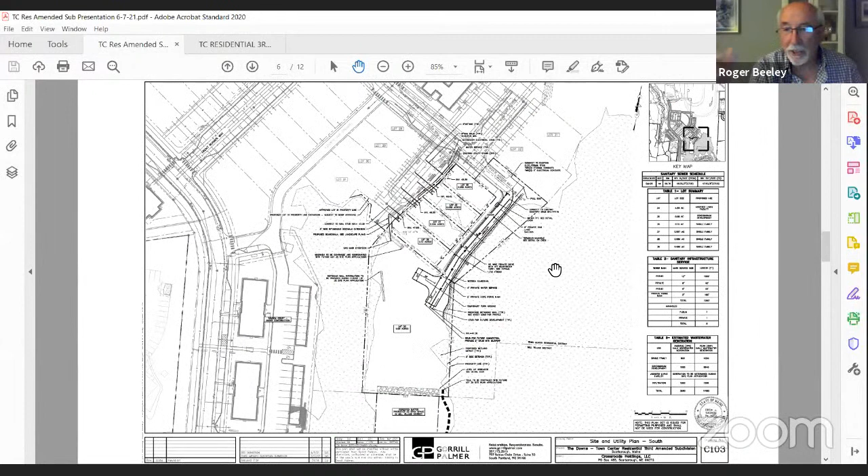So that's my point of view. I mean, one thing I agree with you, Nick, we've seen a lot of this already. I know they understand what they're supposed to be doing. So as long as they can explain to me why they may be deviating from it, and we're allowed to accept that, then I'm fine with it.

Thanks, Roger. Any other board members? Can I speak to a couple of items to address the board? Sure, Dan, I think I got one more board comment coming in though. Okay, sure. Was that Rick Duperi? No, it was Russ, actually, Nick. Hi, Russ, go ahead.

So I want to come back to this notion that Jennifer brought up of maybe some sort of circular feature there at the 75-degree angle.

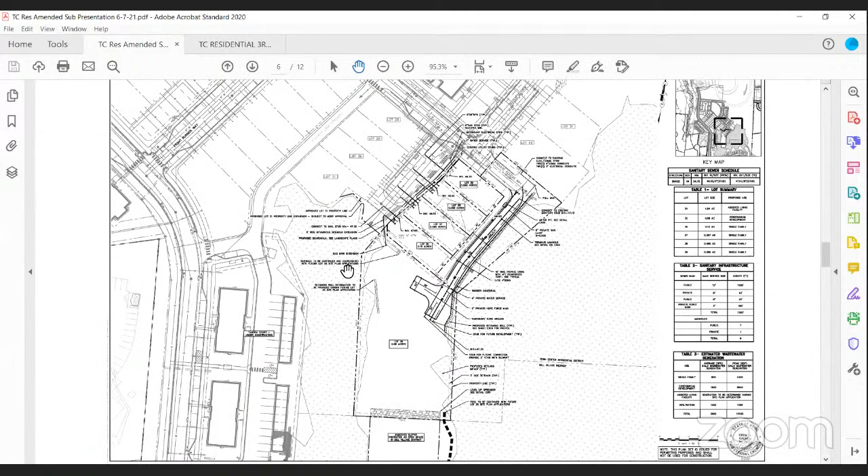Just out of curiosity, Drew or Dan, what would the horizontal difference be? How much additional space would be taken up? To come in square, I mean, it really depends on where we're talking. I'd want to come in square to the intersection for probably at least 50 feet before it curves. Out here by station 37, I don't have an exact distance for you, but just eyeballing it, it's probably 25 feet or something like that from a center line difference.

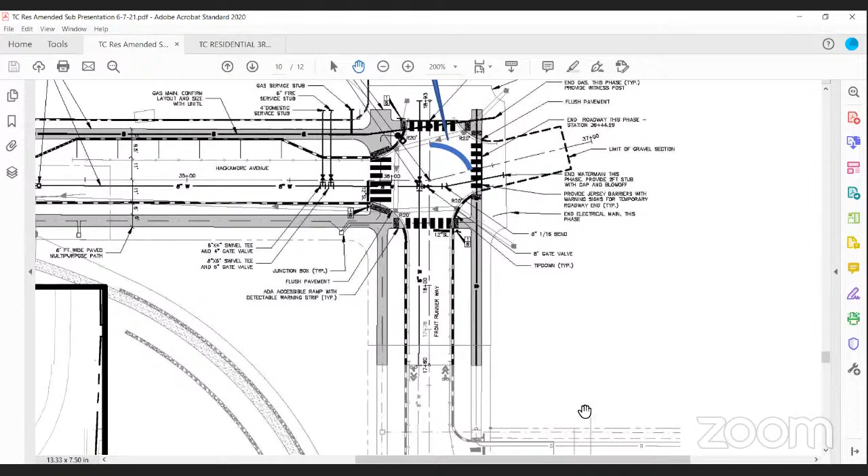And a roundabout feature, for example, what would that take? I think you'd probably have to do something like a 75 to 100 foot diameter roundabout in that location. Just eyeballing it, somewhere where my hand is showing would be your edge of pavement, and you'd have to put your right of way and sidewalks around that. So you'd lose 30 to 40 feet on the corners at least, and then it'd get better as you get away from it.

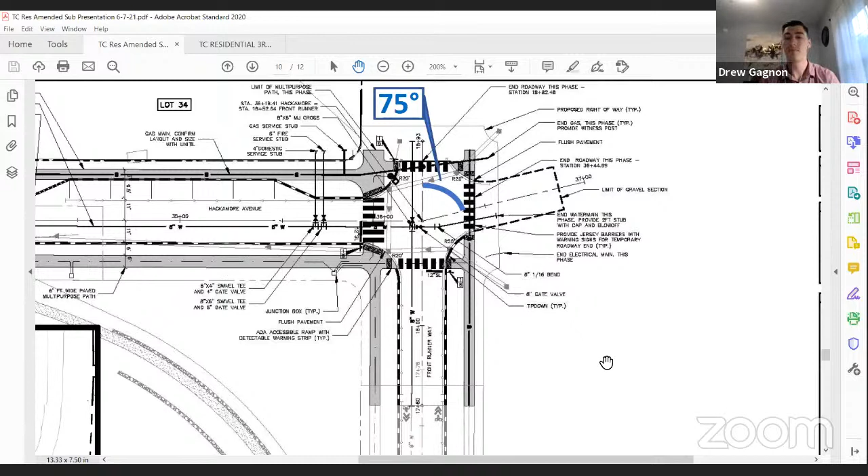It would be helpful in a lot of ways to see this sort of thing when these comments come up. Notwithstanding, you heard a lot of diverse comments here tonight about the project. It would be helpful to see these sorts of things plotted so that somebody could say, hey, we did look at this, let me just show you what that looks like, and this is why we didn't choose it. I think that sort of thing helps a lot here.

Notwithstanding the engineering and design features, you have other concerns that weigh on your decision for your design. What this board is trying to do is just trying to make sense of what you've presented here, and I think there's been some concerns expressed. I'm just speaking from somebody who's new.

Dan, we talked about once upon a time seeing some sort of a master drawing. You've shown it a couple of times and I love it. I wish I could just freeze frame it so I could study it, because I don't have the benefit of the knowledge that you all have. I'm new to this whole project and all the various phases, but trying to follow, which is what I'm doing here now, and trying to consider this little piece in the context of the overall project.

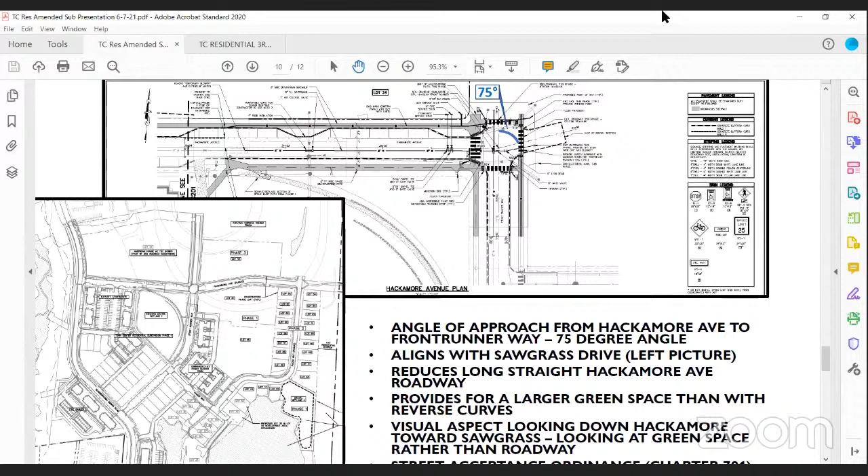There's benefits to some of these suggestions that have been made tonight. I think it would help in terms of the project and the feel of the project, but there might be a short-term economic hit for that sort of thing. That's my only comments, Nick. I'm purposely trying to stay quiet here tonight, so yeah.

Thanks, Russ. Appreciate it. All right, Drew? I'm not Drew, Dan. I was just gonna, and I appreciate that, Russ.

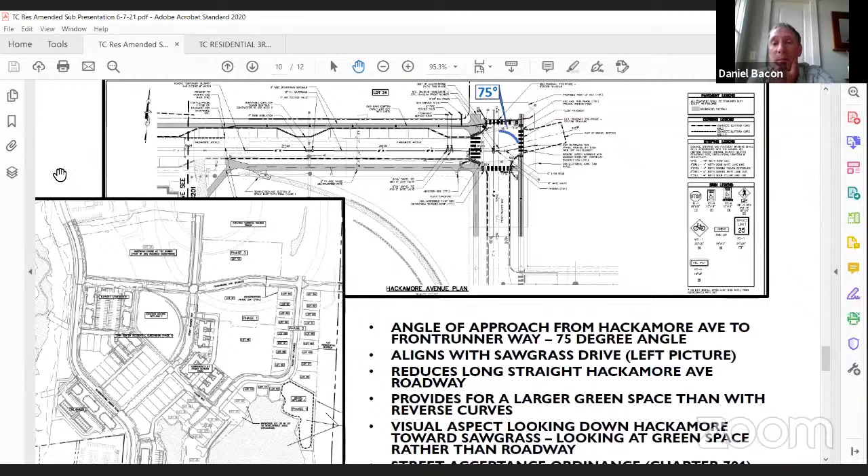We have been meaning to provide the board the master plan and actually have an update workshop at some point soon. One of the big initiatives right now that I think the board is aware of is the downtown committee, and we're working with another town committee on the layout of the center of the project. Jennifer kind of rightly brought up that in past plans, there was a vision for the center of the project to be in the center of the site, in the middle of the inner track.

The more we've worked with this committee and the more we've worked with our consultants, we're thinking the commercial or mixed use center of the project is more to the west, closer to northerly of the grandstand, which would actually not drive as much traffic through the intersection we were just talking about.

And we're working with another committee on how that plays out. So there are a lot of bigger picture dynamics that we look at. As soon as that committee gets a presentation later in June, I'm excited to present it to the planning board. We first need to review with them, given the role of that committee.

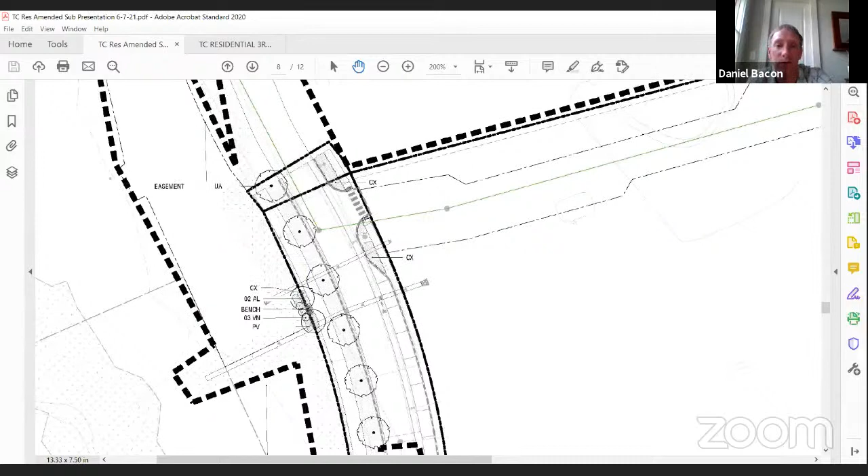Just on a more micro level, about street trees. The only reason we didn't provide street trees where Jamel suggested is because of sight distance in terms of the driveways to the American House site. So if the town's peer reviewer is happy to work with us on trying to get street trees in where there isn't on-street parking, we're not trying to get out of street trees as much as manage the board's expectations based on comments we've gotten in the past around sight distance. If you see that northerly driveway, there's no trees on either side where they would fit. So we're happy to work with staff and Bill Bray to see if they fit and also meet sight distance requirements. But that's the reason they're not there currently, and we'll look at that again.

The lighting, I think we're fine adding the lighting where Angela suggested. We weren't 100% sure as to the intent. So we think lighting can work there. We'd likely add a light at the end of that drive with the micro homes, so you'd have a light when you come in and then likely a light when you get past the homes. But we'd rather not put a streetlight in between garages that are tightly knit, and we didn't do that in past phases. I don't think Eastern Village or Dunstan Crossing have done that on private alleys, but where there are key points along the way, we're happy to do that to make sure it's safe.

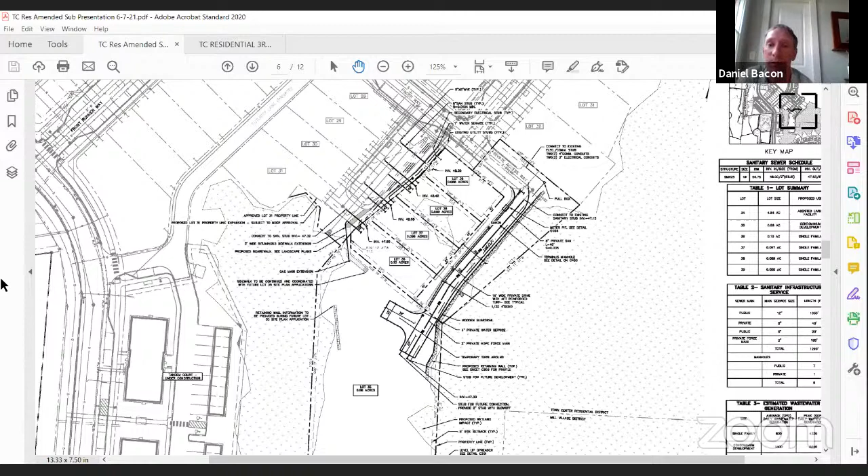And lastly, just on the intersection design, we're pleased to provide more context. 60 degrees is allowed under the ordinance, and we came in with a compliant design. So I think it's better than having a 90-degree intersection, frankly, from an aesthetic standpoint. We'll certainly follow up.

Nick, can I jump in?

Absolutely. I wanted to speak up a little bit from staff's point of view, first off about the lighting. I'm of the opinion that our lighting standard really goes to the fact that we're not lighting sidewalks, so it's really about motorist safety. That's where my concern was focused, on the curve. To Dan and Drew's point, I'd be in agreement with people's thinking, as far as a lot of people ask for streetlights on their private property for safety or theft concerns, and I don't think that's the intent.

So I appreciate them working with us on that motorist safety piece. But I did want to also speak to the intersection, because we've had conversations internally, and I think it will be a continuing comment from staff to the board to look at, just because we're also looking at it from Public Works comments about operations and maintenance through this intersection. And I appreciate the examples given.

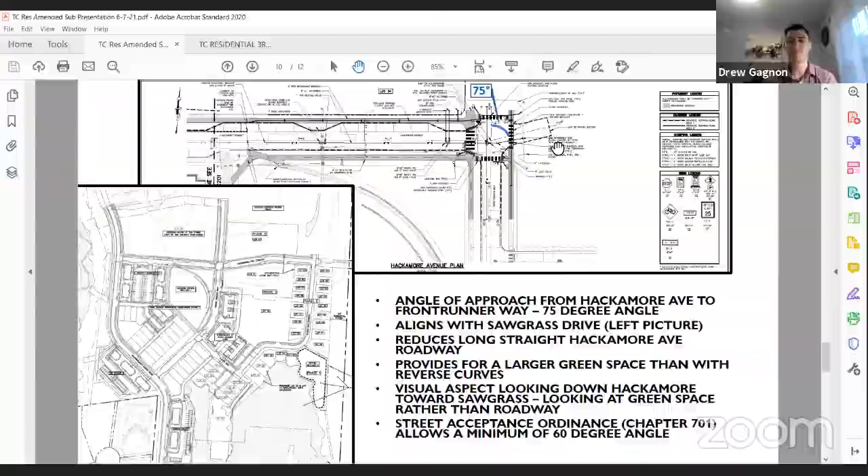All right, next item, staff report. I can jump in if Angela doesn't want to quite yet.

So I do have an update from Jay Chase, our planning director, about the comprehensive plan and where it is in the process. I know he emailed you guys before the meeting, but he asked me to update you. As part of the comprehensive plan process, the state requires council and planning board to conduct a public hearing on the matter before adoption. While the Long Range Planning Committee is charged by town ordinance with preparing and coordinating updates to the plan, the council is actually responsible for the adoption, and this planning board serves an important role in your quasi-judicial role of reviewing development scenarios against the town ordinances. The comprehensive plan has had nearly 4 years of public input and discussion, and council is being asked to consider a vote on the matter in the upcoming month or so. Many of you on the planning board have been involved over the years helping to shape the plan as it's drafted, and it's believed to reflect the public input and community feedback.

On June 16th, the public hearing of the planning board and town council will begin around 7. Board members should attend via Zoom as requested by the town manager to help facilitate the meeting due to limited seating capacity at town hall. The link will be provided on the town's calendar on the website a few days prior to the meeting, and staff will also try to remember to send out the link as well.